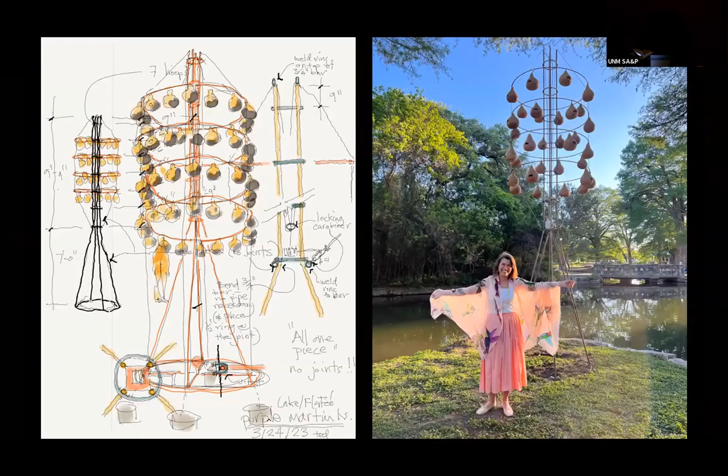So now I'm on this, we'll talk about the house, look the way we organize that, how we organize this fall from our process. And we use the word to illustrate how we approach this. And we began because...

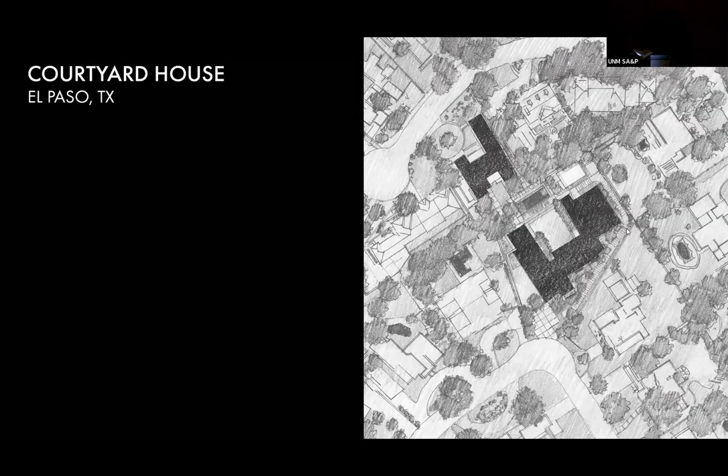And we love getting to meet our clients on the land, and it doesn't matter the scale. It's still the same issue of getting to know the place, talking with them, and simultaneously talking about their programs, but in a manner. So that you're trying to program the land rather than discussing what is appropriate and what's not appropriate. And so it's helpful. And that is the product.

So what we did was build the inside - this is going to be the land. This is all about making a big courtyard space where you can see the sky, because we were kind of fighting the terrain on this side. So we could get a big sky, get views around, and edit out the neighbors' houses. So we built the house with concrete walls around the perimeter, steel and glass, but it was all about the courtyard and thinking about how the program would handle that space.

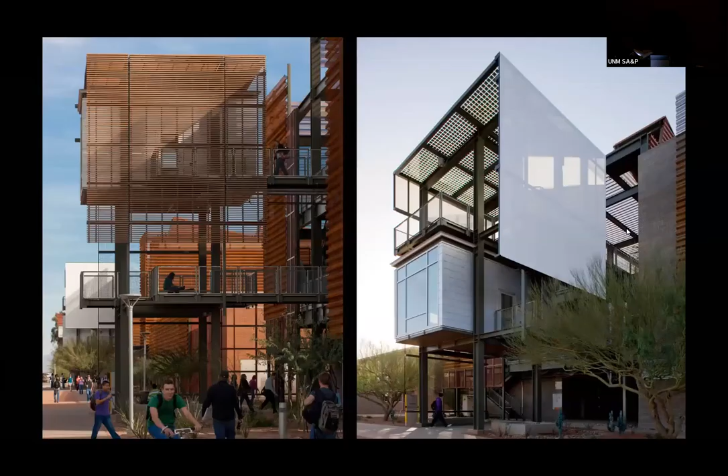We had great collaboration with Christy Ten Eyck, a landscape architect who was in Phoenix at the time and is now in Austin. So this is the Desert Wall - it's a desert walk with water, all the fluid space, and ultimately it's held in this amphitheater down at the end. The collection of buildings along the south side of this new desert mall creates these kinds of spaces that draw you in.

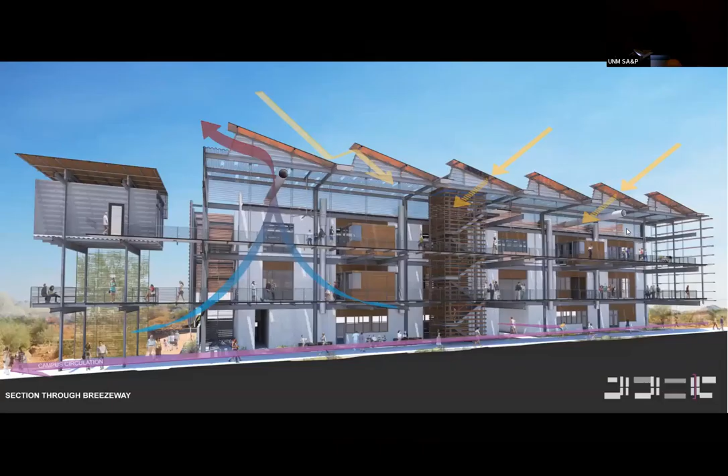And some of my favorite spaces - this is where we did all the lawn circulation. We had a huge amount of circulation indoors, and actually what we saved by putting it outdoors was money. We had these narrow spaces that were like the streets of Marrakesh, with perforated metal above and flow systems running through it, but it invited people into the space. It was great, and it's also ready to deal with the low angle sun. So we had two different sides facing each other, not having to deal with that kind of stuff.

And I enjoy kind of sharing these two scales of concept - working on a house scale and working on a university scale. It's quite delightful in that you can do different things, get different issues above that. So that contrast and that change is really nice.

In this case, this is the ranch. It's on a kind of flat-top mesa. Normally we would not put buildings up on hills, but this is an unusual hill - trees on it, nice flat top. It didn't have kind of a lovely river and things that you sometimes get in buildings. So what we wanted to do there was take that problem and start to talk about how the program could make a space on top of this kind of river-shaped base.

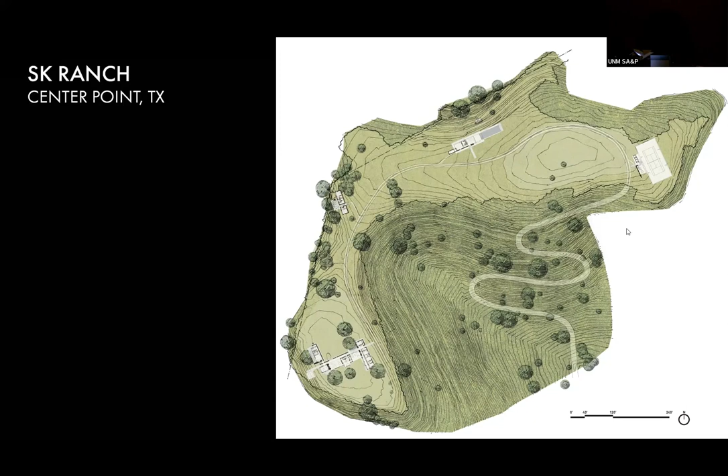And so it's the main house and the next house, but the idea was using station limestone, and using those walls to start to define and have a relationship with each other. So it's small little buildings within a larger, broader landscape, collaborating with Tary Arterburn with Studio Outside there in Dallas. But the idea, a lot of the interest, is staying outdoors as much as we possibly can with a project like this.

Urban scale was the work we started, master planning probably 10 years ago for a person who bought the old Pearl brewery. It's about a mile or so upstream from the core of downtown, and it was an industrial area where the Germans would put their breweries.

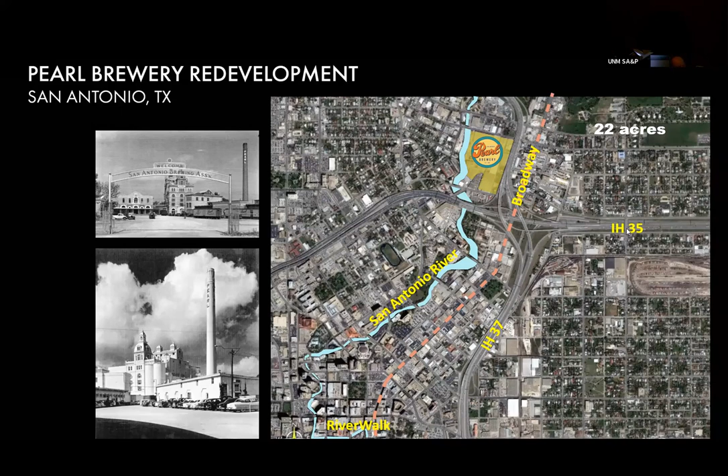There was, when we were getting to work on it, a lot more asphalt than anything else. So the key was creating a plan that laid out all the outdoor spaces simultaneously. We were very lucky, our developer was not a professional developer, so a professional developer probably needed to get a return a lot quicker, and we'd probably be dividing up the land pieces.

Instead, we were able to do a true master plan and then start to check off the boxes and slowly create a brand and a place for this really transformative project for San Antonio. It's had ripple effects all around it, and it's also allowed us now on urban scale to get into a number of design projects.

We took the client on a tour of some great Mexican plazas, paced them off, talked about the scale of those spaces, because some of this is existing but a lot of it is new. We needed to make space with the new buildings and also bring back the ones that were lost in the sense of the grid, but it had a kind of screwy arrangement through it that had interesting routes.

We created the opportunity in the earlier stages where you drive through, but in the later stages you stop traffic. So it's a way to introduce a lot of the ideas of the place more easily to people, make it more accessible. And then it was a lot about the landscape.

We worked with three different landscape architects over the years on this project, and it's what we love doing. We're lucky enough to get to work with really great talent all over the country. One of the things is that we ask to be involved in the landscape as well as have them involved in the buildings.

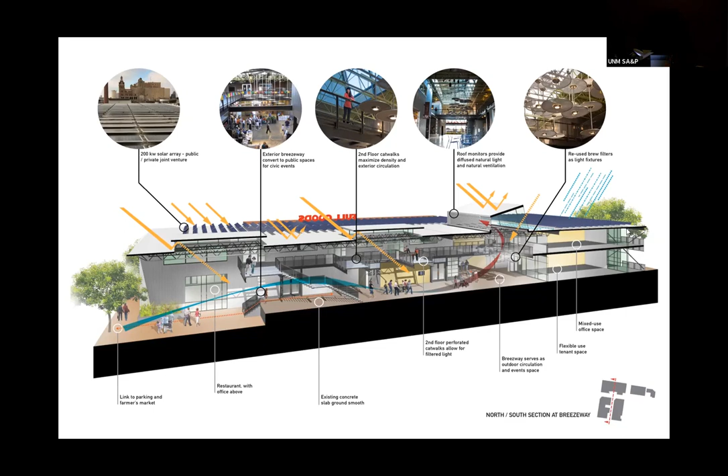This turned out raw and interesting, and it's probably one of the more popular buildings. It's also set the direction we're going on this project, but it's allowed a lot of other hands in—like our office, it often has different people working on the projects, embracing the same philosophy and leveraging that new perspective, and we think the work gets better over time.

This was a project where they started hiring a new office as well, and it's delightful to see it evolve in a really fluid and natural way with the city. But it had good bones, good structure.

When we first were working on the project, we said one thing we wanted to make sure of was that we set all the elements to allow for the different parts of the old beer industry, and put it in the warehouses. So every time someone renovates or does a restaurant, they can go to the bone pile and use a lot of that product. And then there's just the river.

It's a very important project to restore and renovate this section of the river and invigorate it. As the river continues to evolve, it's critical to having some level of energy adjacent to the river.

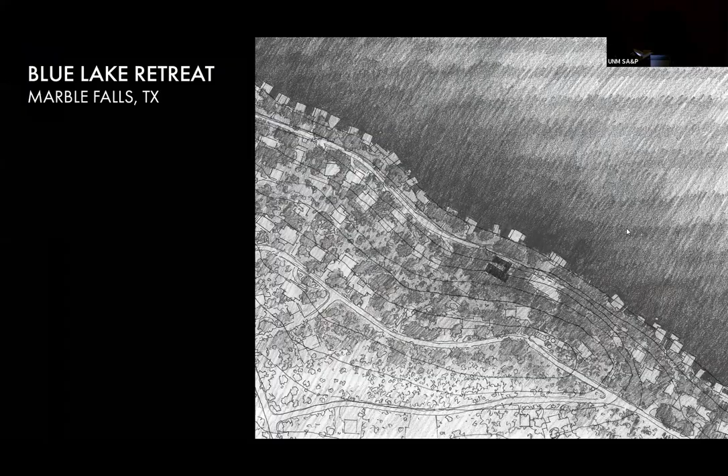So this project, I'm showing you this one. This was for a friend of mine. His father was one of the big high-rise architects, so the kid grew up with a fabulous sense of it. He was big on high-rise, and we had this very, very steep site.

So we were thinking, in order to work with that site, we also needed to build a dock. How do you make a boathouse sit on hard granite conditions? That also spoke to needing it to be light steel, since we're working with a very vertical building along the hill. It needed to be stiff and strong, and doing the leg meant the two buildings were informing each other. So we built at least that superstructure out of steel, but given the expense of steel, everything else is wood. We tried to keep the real critical structural components made of steel and everything else made of wood, then used that steel to tie back and contrast with the lightly granite-based cliff. That was the notion of that project.

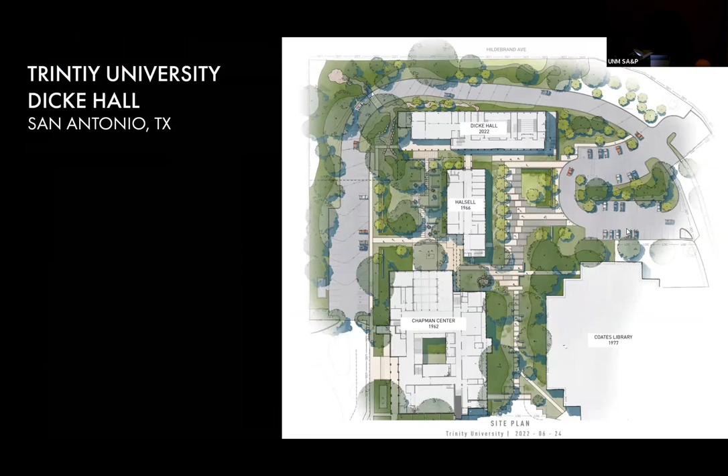Recent favorite projects is one we're working on at Trinity University. Let me explain this—this subject again is just that. They're not new to San Antonio, work by O'Neil Ford. O'Neil Ford was a marvelous Texas regionalist who moved to San Antonio and worked on some very big projects, including renovations of some of the older sections. So he really got to appreciate older things, but he was also a modernist, and Trinity was one of the best examples of this work. Trinity is a small campus, let's call it, in the middle of town, built in an old rock quarry.

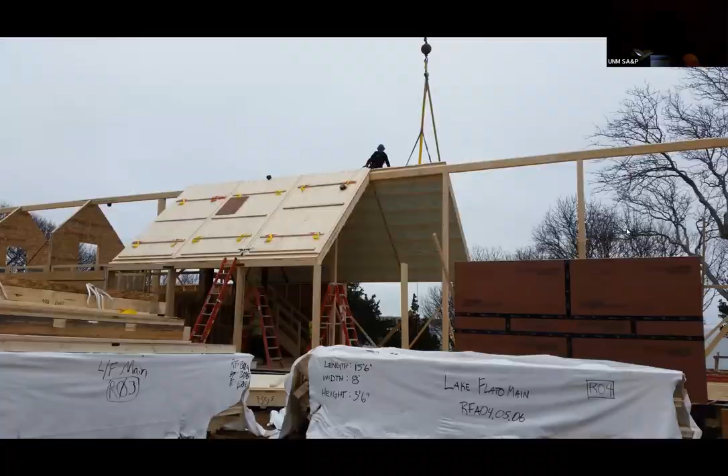But the technology played a big part in our thinking and the opportunities. The idea was we could start the panel process well before we got a permit. So we were putting in the permit, and by the time we get the permit, we could build all the way to the slab, and then bring the panels in. It was also a speed issue.

It was about the permitting process, but it was also a kind of sustainability - we always try to imagine what we can build in ways where people don't have to travel long distances. In this case, by having the shell already built, we could save a lot of money by not having to rely as much on local labor costs.

And then once you have that decision - structural engineers are critical players in our work, but in this case we're using the engineers from that company. We were able to do spaces like this that you wouldn't normally do - columns would be exposed and done beautifully in New Hampshire. We could order the windows, laid in advance, so things could go along, and then you can celebrate the volume.

On the outside, inside this light - light can come in, open it up easily in the summer, but close it in and make it really intimate in the winter. So it really worked to inform the way that we build it. So opportunities - we're always looking at clients for these kinds of opportunities.

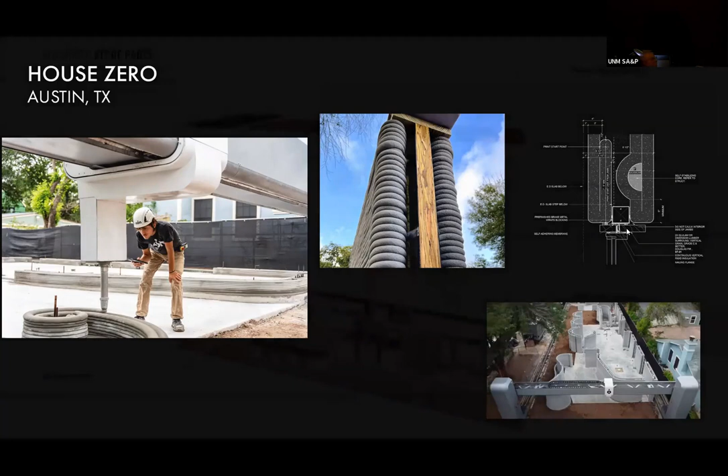There's still a lot of work in the architecture. So what we thought too in this opportunity is how do we also think of all the other elements being prefabricated. Now we're probably not going to do them prefabricated, but it needs to be thinking about it for next time. So it's always thinking about things that way.

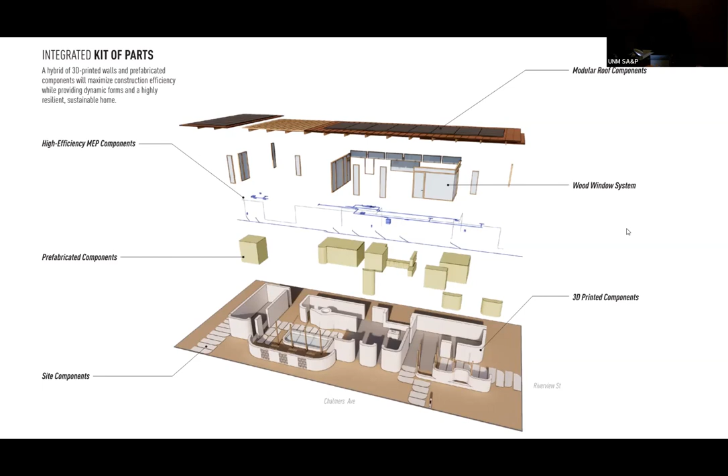So we imagined a lot of the cabinetry kind of things, kitchen kind of things, a lot of the interior infill things, all out of wood. And this building did get built in 6 months, and it was during COVID, so it's quite incredible.

It was just because we really spent time on it. The other part that we wanted to showcase is all the things you can do. But this is the opportunity to use it. So we did these little benches, kind of rather interesting spaces, and it's a tiny house.

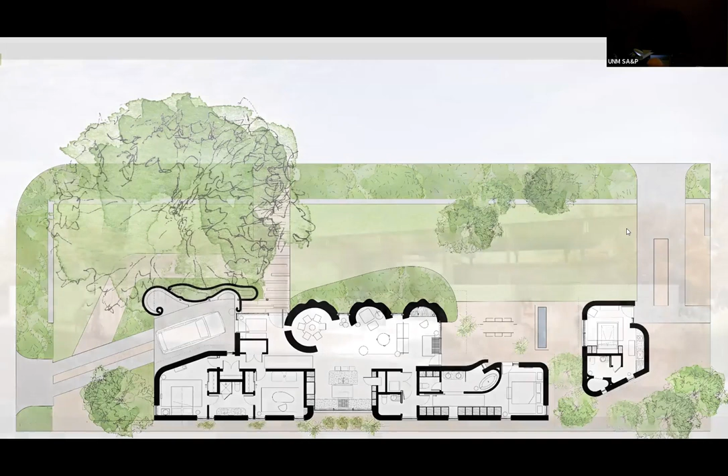It's really a small square footage house, but it feels quite generous. And we did that by this vaulting, big space, vaulting, which we didn't actually do at first. It was a traditional block, deck and beams, but by popping that roof up and having the low closet sections, you get this sense of volume in that type of space.

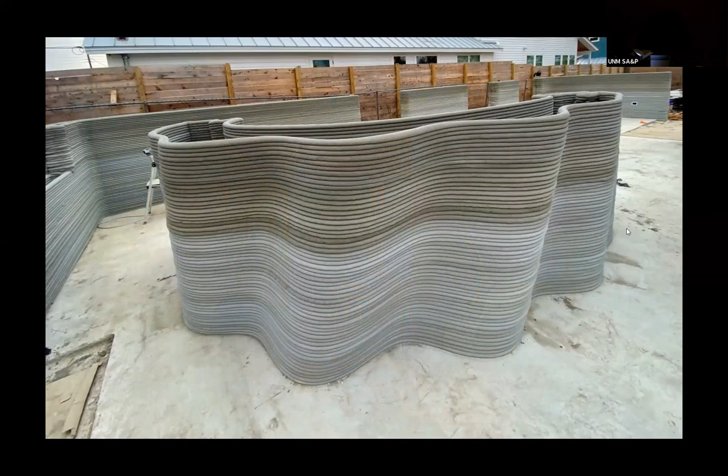And the wild thing about it is changes in the sand, the water, the air changes. You end up with a corduroy effect. These walls are quite elevated, quite beautiful, and very soft concrete. So it informed how we were going to do things.

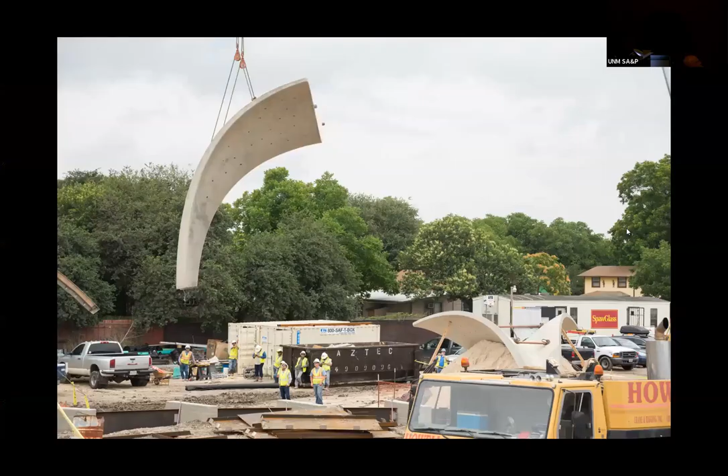And the assignment was again about the shared structure. So we also thought that we would do this offsite, which is pretty straightforward today. And we would pour multiple shells on site, and then pound it all locked in. And what we wanted to do with the shells was make them like a rock formation, in the profile of the grains.

The author really knows this karst geological condition, where rainwater comes down through limestone and creates many dry caves. So basically, when the shell structure works, it cracks in the upper parts of the concrete when it comes together.

The water rolls off the edges of these things, much like it does elsewhere, and goes into an underground cistern where it's recycled. All the planting was native grasses, to demonstrate how to plant in South Texas.

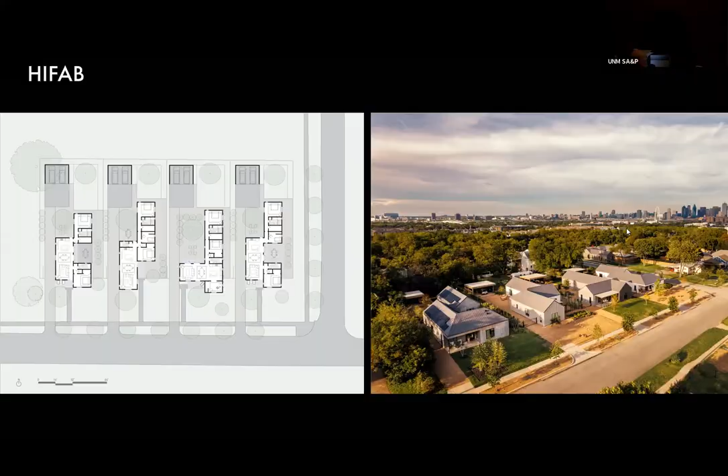This is actually a picture of when we were doing the Porch Houses with another person's factory. I can show you the method. It'll be interesting to see, curious how it's something we have an obligation to constantly tweak and look at.

All of this, the land, the program of the land, thinking about how to build, is ultimately about sustainable business management. It always gives opportunities - you can always do the most sustainable things at the time, setting examples for opportunities.

In this particular case, this is the Dixon Water Foundation, a nonprofit focused on tallgrass prairie inside of Dallas. They wanted a visitor center so people could experience it, and they're also very interested in sustainable agriculture, combining the role of water in grass management. So it was a perfect opportunity.

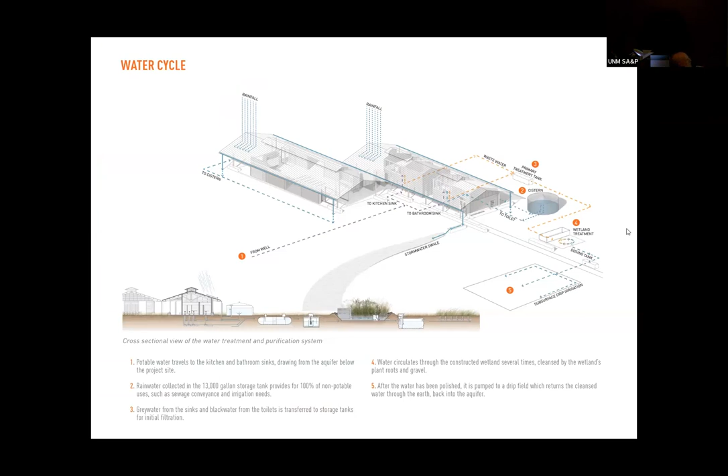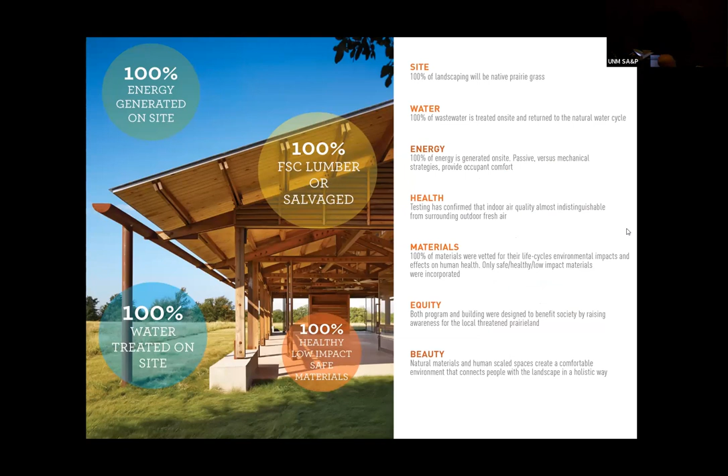So we had rolling walls that can knock down wind, and then thinking about rain management - collecting that off the roofs, and the whole method of rainwater treatment, working in this case with Biohabitats on a sustainable wastewater treatment system, not a septic system.

And a winery - not too long ago, in the old wine section of California, Paso Robles, celebrating the beauty of winemaking in a house, in a container that would reflect well on the whole process of winemaking.

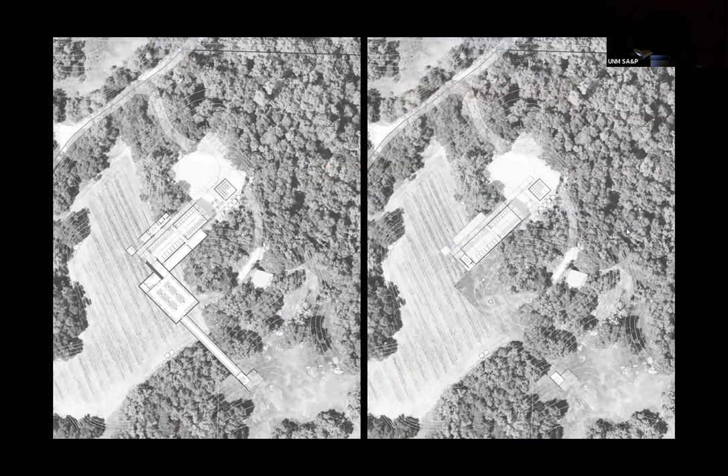We thought a lot about how we could have these really unconditioned shells for the winemaking and wine storage, so a very limited conditioned footprint. A big shed with an automated window system that you can adjust to allow the cooler air in at night and close up during the daytime, thinking a lot about circulation, airflow, and celebrating the whole winemaking process.

Then thinking about storage - normally you might put it in a keg, but in this case we did it as an underground bunker, made of concrete with portals to bring in natural light, into this cool space. This is before the grasses were growing, up and over that collection area for the wine storage, and in addition, a pretty small, minimal space for things that are required.

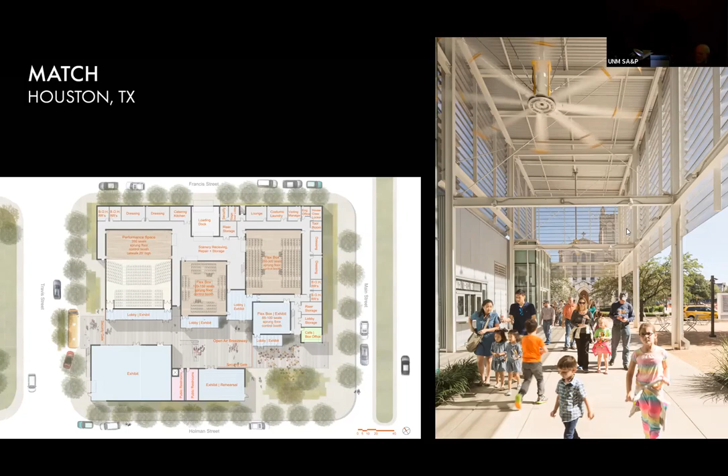It becomes like a great shared plaza space with a big roof shading the color, and it has been very successful. So we made it in steel, perforated, not only the greatest stair that leads to other levels, but all about creating an open air lobby.

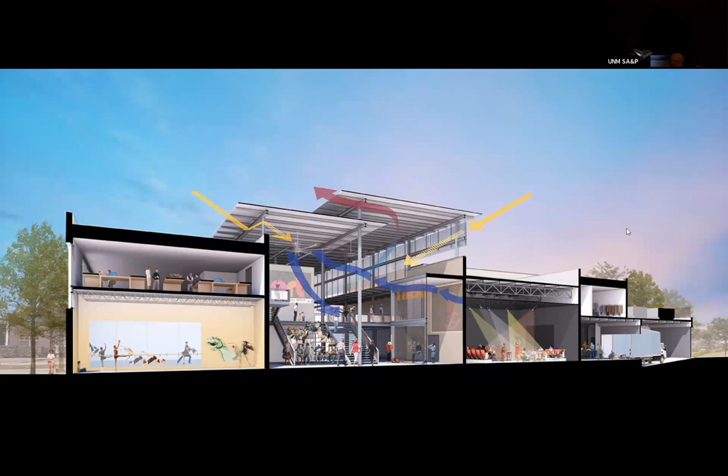And the theaters are not the easiest things from which to create a sustainable income, but you can do a lot of other things. You can arrive at a great place for that.

So that is it. Now let's find out who won it.

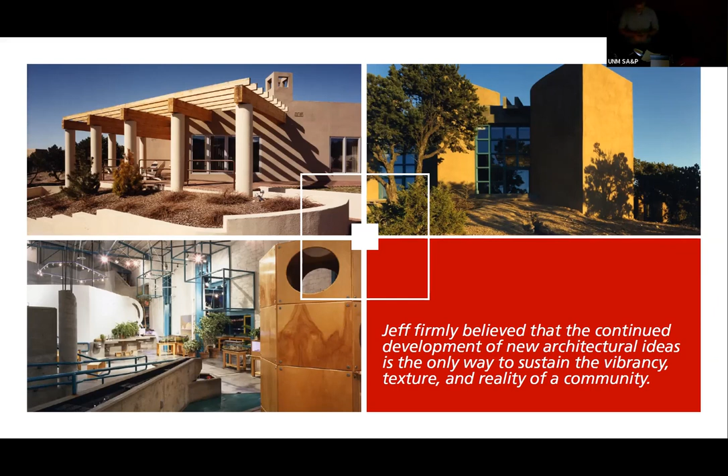This award started in 2007, as we noted last night up in Santa Fe. It originally started as an award for contemporary architecture, which it remained that way for quite some time until 2018, when it started to expand into unbuilt architecture and unbuilt landscape architecture. It wasn't until 2021 where it really expanded the award, and we started exploring some different topics where we looked at emerging New Mexico practice, but also started including student work in architecture and landscape architecture.

If anyone participated in the juror roundtable last night or listened in on that, we are always in conversation of this continued evolution of this award. Because in 2021, we also expanded from just being New Mexico to looking at the Four Corners states, and this is continuing to redefine what is the Southwest, because the original award was the award for contemporary architecture in the Southwest. There was some fantastic discussion around that last night as we started to massage this boundary with the student award, looking at ecoregions. We were talking about watersheds, and just looking at the original indigenous inhabitants of this region and how they've also adapted to this landscape. So the award continues to evolve.

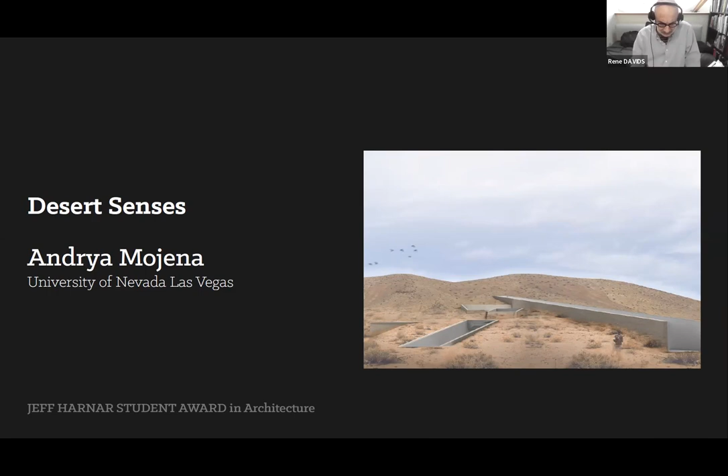We wanted to say that we were really impressed with the project because it seemed to capture the desert and that special area of the desert really well. We were also impressed by the 4 categories she used, which were under the ground, in the ground, on the ground, and over the ground. These spatial differences were really appropriate for expressing the idea of the desert, the vastness, and the relationship to the sky. We also thought that the gestures were subtle and they seemed to capture everything which is so dramatic about the desert. Fritz, do you have anything to add?

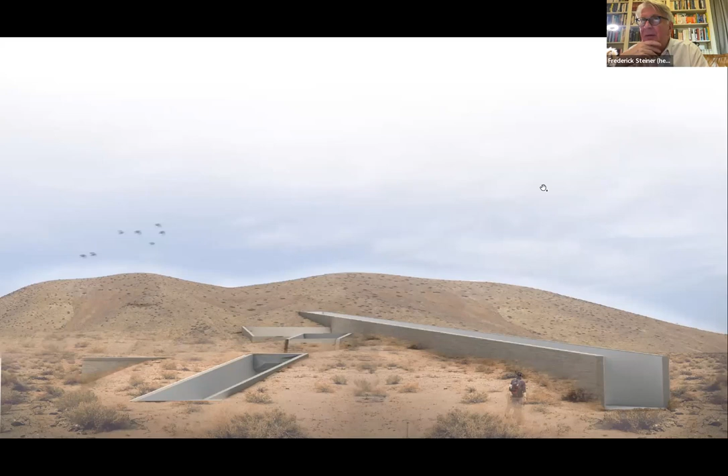Yeah, I'd like to also just add my congratulations. We found it a very stunning presentation, and there was a very strong linkage between the analysis and the design, and especially attention, as Rene said, to the environment, but also careful use of materials and exploration of materials. Also the sketches were particularly nice. They seemed to lead in a very fluent way into the design, and we were impressed by that as well.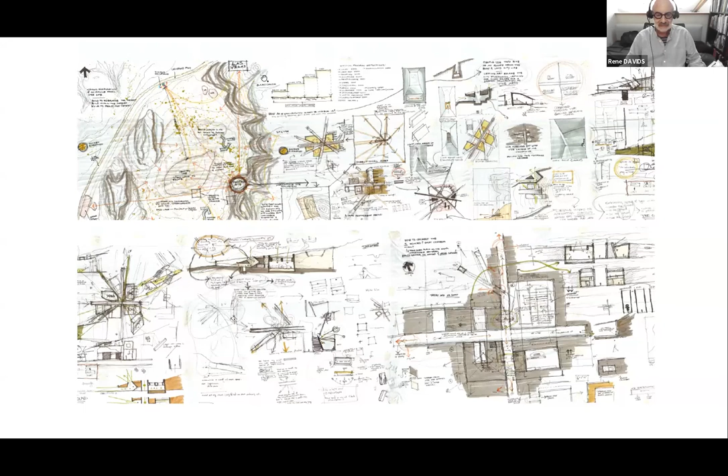What's that? Oh, yeah, congratulations. Thank you. Yeah, which, I have no idea. Oh, that's really bright. I go here. Which one? Did I just shut all lights off? There we go. All right.

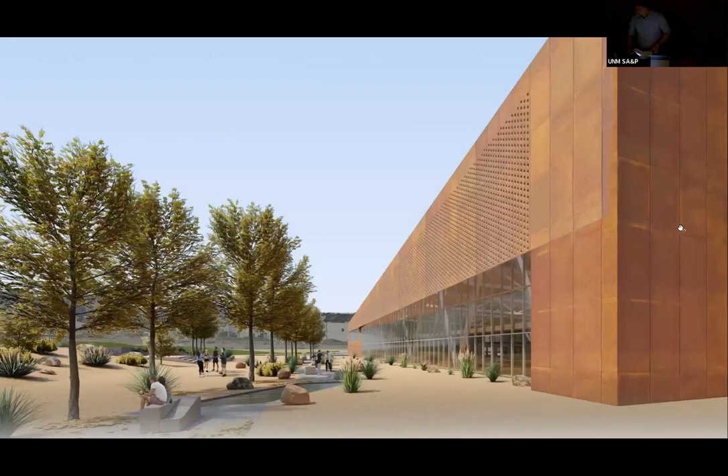And jurors, would you like to provide any comments on Thomas's work?

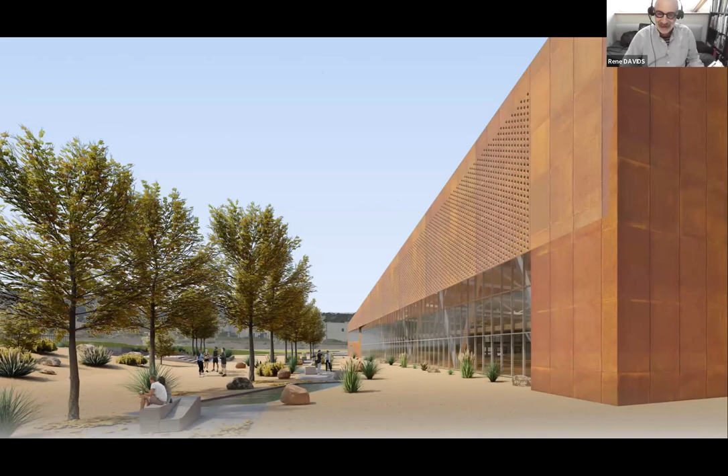Congratulations to Thomas and the University of New Mexico. It's great to have one of their students winning the first award. We were really impressed with the concept, which was derived from the mine. It seemed very appropriately used in the building itself. We loved the use of materials and thought it highlighted the spirit of the desert.

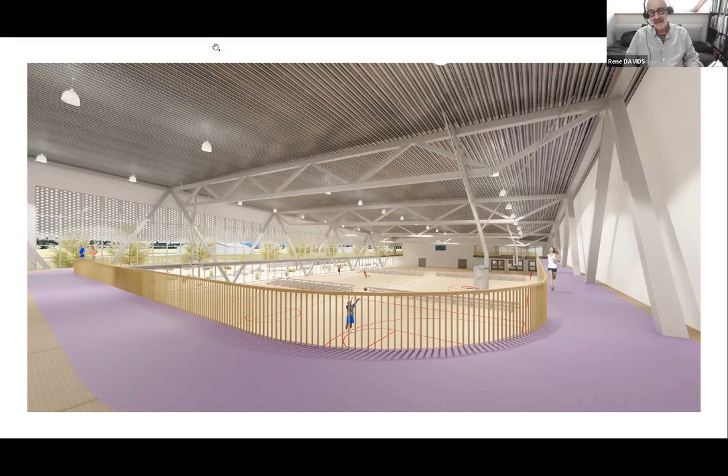This slide actually shows a very interesting relationship between two of the functions of the recreational facility. There's a running track you can see on this bluish color on the top, looking down onto the basketball fields, which we thought was a really nice, interesting thing to develop. So we were really impressed both by the outside and the inside of the project, and thought it was extremely well resolved, executed.

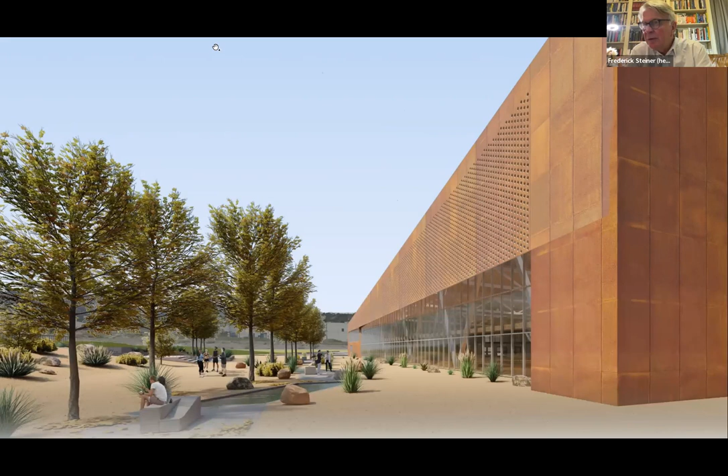We also found it a very convincing design because of its thoroughness. It went from concept all the way through, fairly detailed designs with a very effective rendering, such as this one, and very convincing. So we thought that it stood out for its quality, but also it was probably the most thorough of the architecture and student entries as well.

So congratulations. Thank you. Good time.

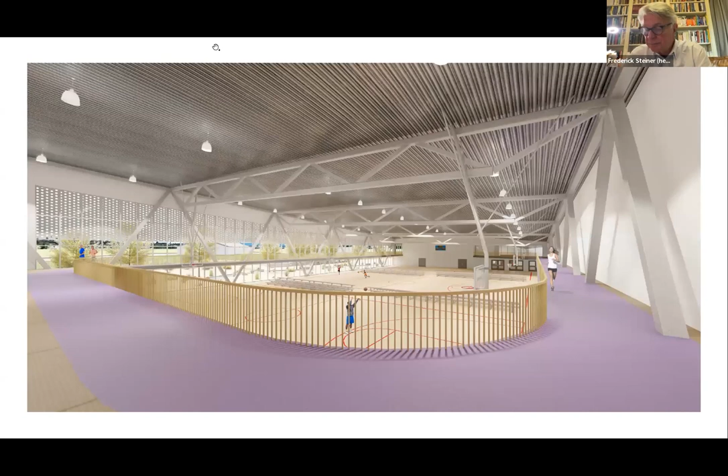All right, and now to landscape architecture. The second prize for the student award in landscape architecture goes to Valley of the Mills, Recommoning Land Along the Upper Rio Mora by Leah Grieser, University of New Mexico.

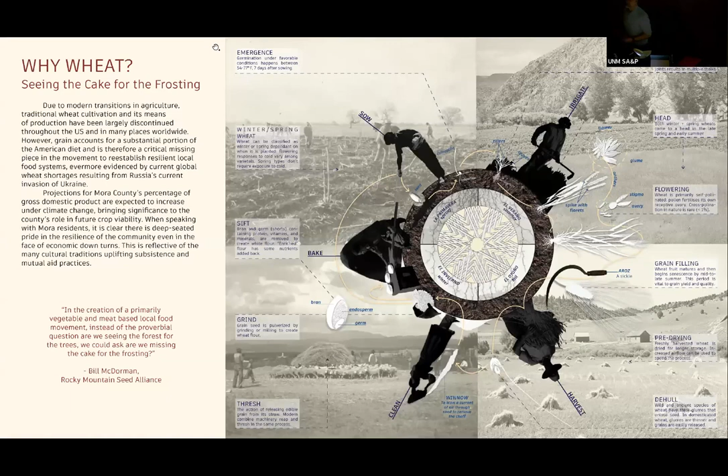Congratulations. Well, congratulations.

Last night at the roundtable, there was a fair amount of discussion about J.B. Jackson, and in this particular project, there's sort of a feeling of Jackson as far as looking at and going through the landscape. It also did a really fantastic job of looking at cultural and ecological revitalization following the devastation of a fire. It showed a great amount of social consciousness as well as environmental consciousness. A very well done and thorough project.

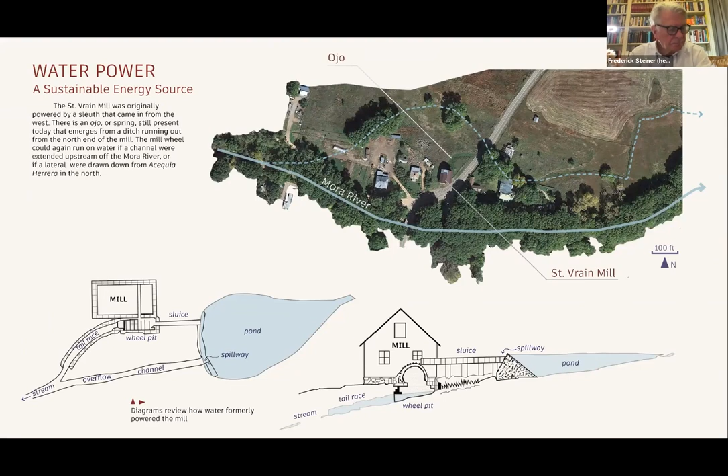And I would just add, Renee really loved this one a lot. Yeah, but I don't have that much to add to Fred. I thought it was really well researched and nicely presented, and it seemed to sort of bring an old technology into back, but given that it was a small project, it seemed really appropriate, and I just thought it was very sensitive to the land. Yeah, I did like it a lot. Congratulations.

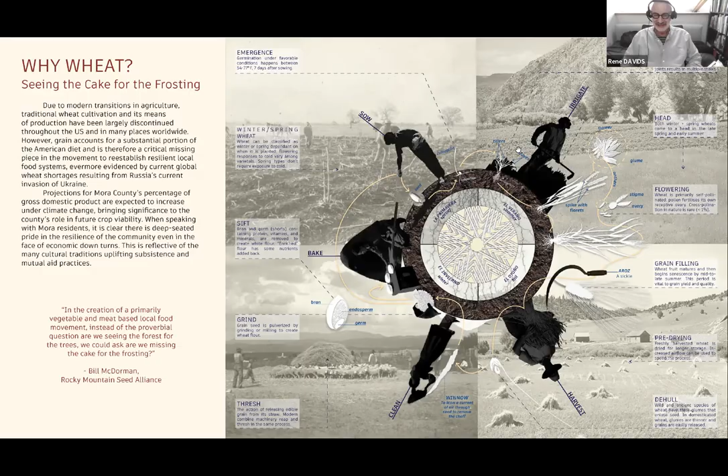And now for the first prize in landscape architecture for the student award. And the first prize goes to How to Love a Mesquite by Hollis Moore, University of New Mexico.

Is Hollis there? Hollis, are you here tonight? Hollis, how could you do this? Well, is Hollis online? We want to congratulate Hollis.

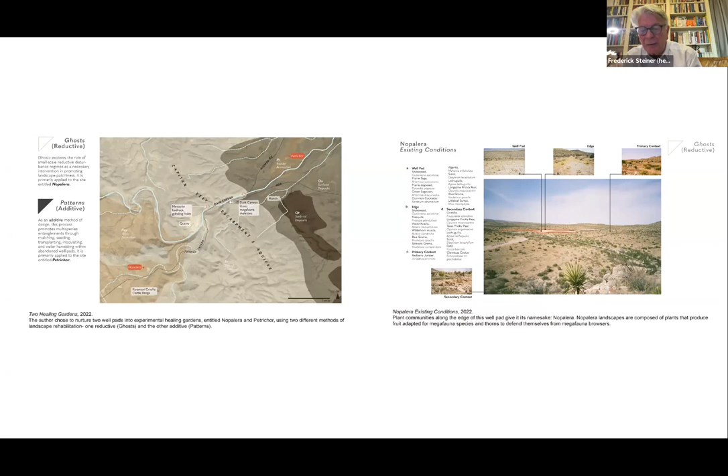This was all of the three jurors, all voted. This was our only unanimous choice, and we all really ranked this first. It's a lot about healing. It's about the Chihuahuan Desert. Very strong analysis. Really liked the mixing of media, everything from watercolor to GIS, strong sections and renderings. Just an overall thorough and well done project.

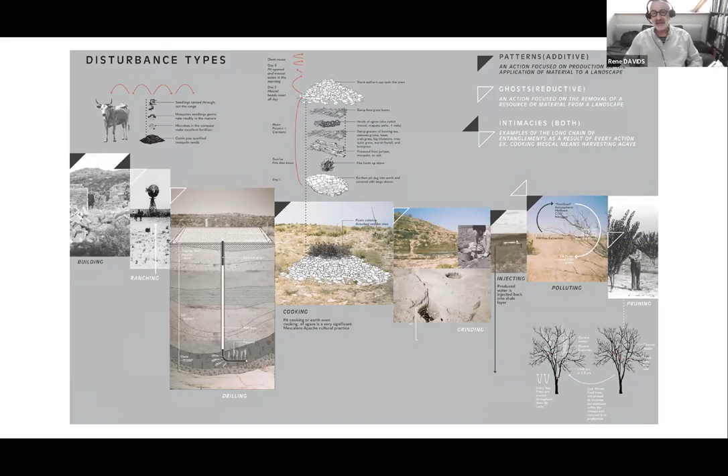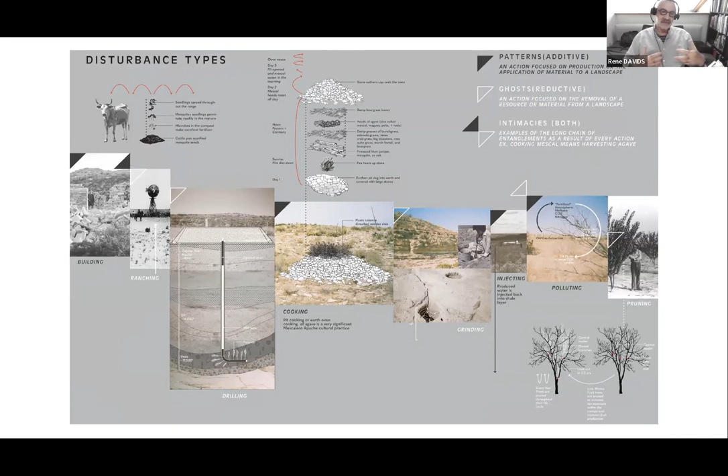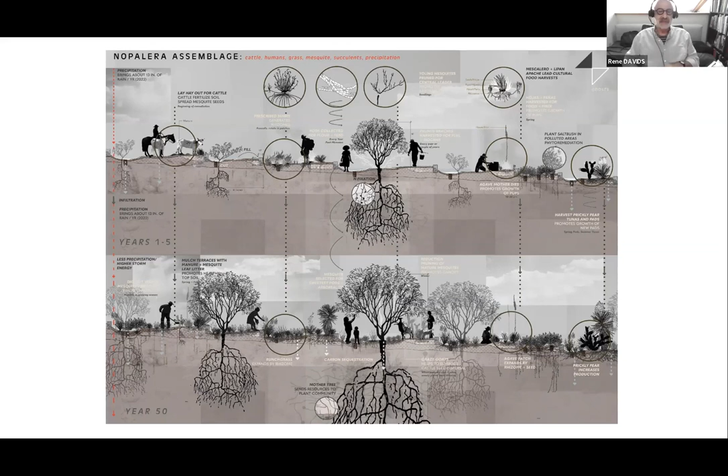Yeah, as Fred said, we all agreed. I think it was the best research and the most interesting of all the landscape projects. I was really impressed by the way it sort of mixed the idea of the landscape, the animal habitat, and humans all coming together to restore the ecology. So it wasn't trying, like many projects of this sort do, to eliminate human beings, but they were very much part of the bringing back of the mesquite in particular. Great. Thank you very much.

And congratulations, yeah, Hollis. The absent Hollis.

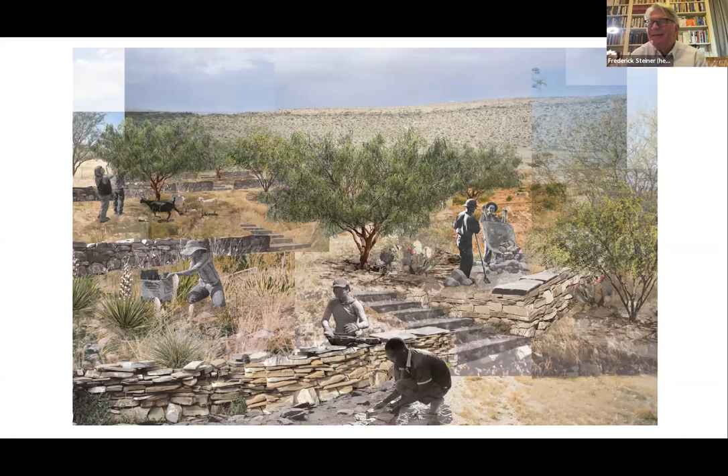All right, and next we move to a new category. This is the Professional Unbuilt Award for architecture and landscape architecture. However, we did not receive any entries in landscape architecture this year. So, but I would like to introduce our jurors. Jennifer Siegel is the founder and principal of Office of Mobile Design, or OMD, and also a professor at USC. Carlos Jimenez is a professor of architecture at Rice University. And we're also joined by Gabriel Diaz Montemayor, associate professor of landscape architecture at the University of Texas at Austin. We are happy to have all three jurors with us today.

And the award for architecture goes to Parawan by Assemblage Studio from Las Vegas, Nevada.

Oh, oh, well, congratulations. All right. Well, congratulations.

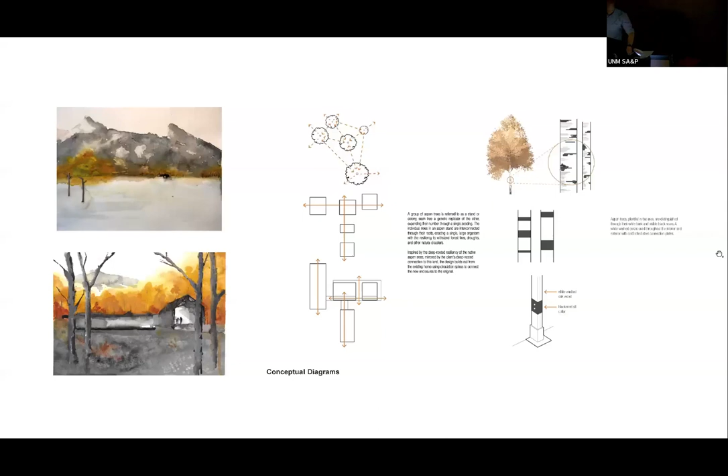What's that? Yeah, you can. Oh, I'll slide you more image. You guys go there, so we can see all. I know, just check for. She's getting recorded. How do these lights work? There we go, that's a little bit. No, like you had them before. Hey, what's that? Does that sort of work? Okay.

What's that? How should we do this? I'll see a couple things just. Is there a microphone? No, you just shout out. Just shout out? Okay, yep.

First of all, it was a joy to work with these two on our Zoom jury, and then to meet here in person and spend a few days together really talking about architecture and concepts and ideas, and the thought behind this amazing prize and its evolution. It's just been a gift to be here.

And this project really stood out in the category of unbuilt architecture. The presentation style, like these watercolors, the purity and the sincerity of the design came across through the media, the attention to detail. What stood out to me was its relationship to elements in nature—maybe the skin of a tree—and how that material can then inform the building. There's a concert between those two elements.

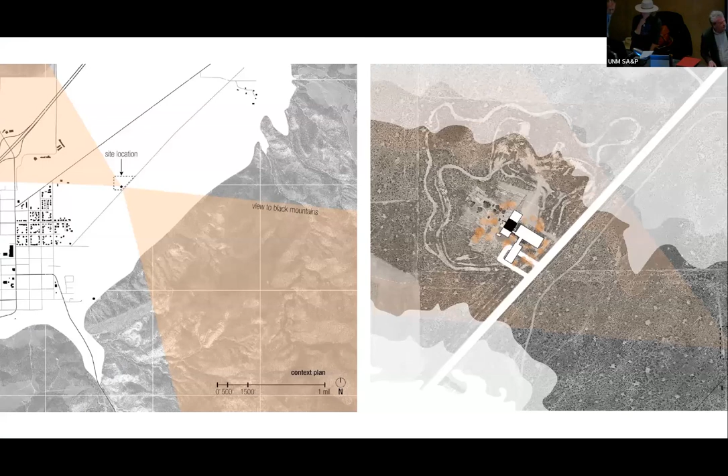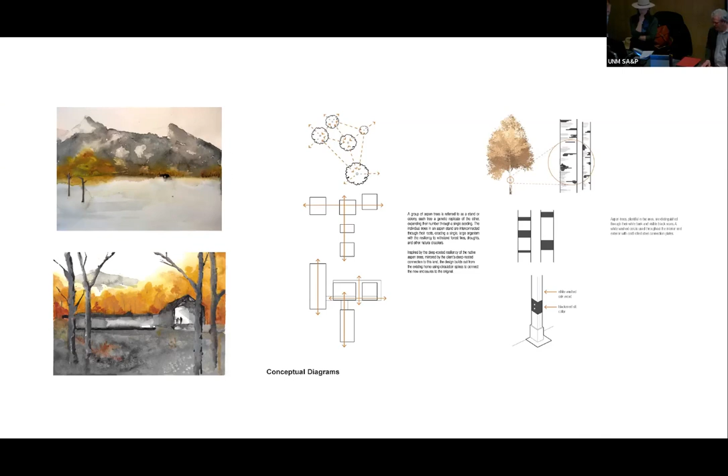But I will say personally I could also settle into the presentation, because it's such a central system of tools and instruments and techniques. Jennifer pointed out the watercolors, which were quite persuasive in the way they create an atmosphere, and also the diagrams. But then you start to see the more technical drawings, and they have the same detailing and sensibility. We love the interior renderings too, that began to relate the continuity of a landscape that obviously overwhelms the architecture. There's an image where you see the columns almost emulating the treescape.

The aspens, yeah, right? They're aspens, yes. And I know it's not a New Mexico project, but it's wonderful to welcome another state in the Four Corners. So congratulations.

So this year we did add another award as we're starting to play around with some different categories, trying to look at ways this award can also align better with the foundation. So this category looks at a jury-nominated project that they thought had a strong sense of social justice in architecture, but also through the lens of the Jeff Harnar Award, where there's a lot of creative experimentation within the project. This came up in the conversation last night, and seeing all the entries, this really made this project click in my mind. The jury will explain some of the thought process behind this, but it's a really interesting project.

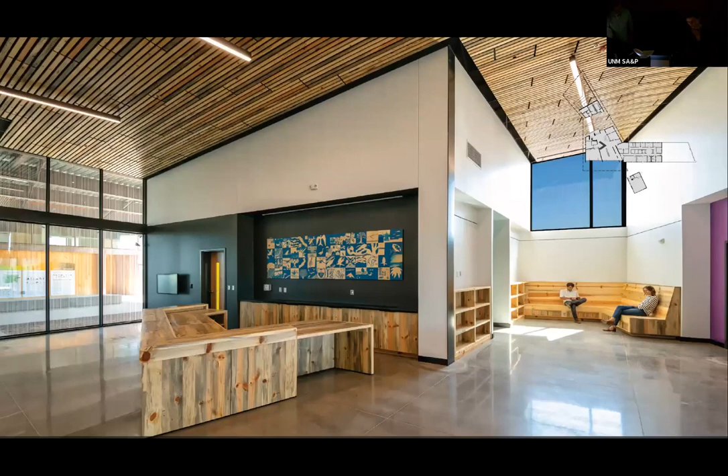I'll go ahead. So, of course, this project is not only excellent in terms of its design qualities, and I actually went there this morning to check it out in person and can confirm that I'm really happy that we made this decision, because it really frames the landscape in a beautiful and light way without overpowering it. It seems to float above this immense plain, using materials that are contemporary but at the same time very beautifully integrated with the land. And I'm sure that with time, the project will gradually blend even more into the landscape. This is something that takes time.

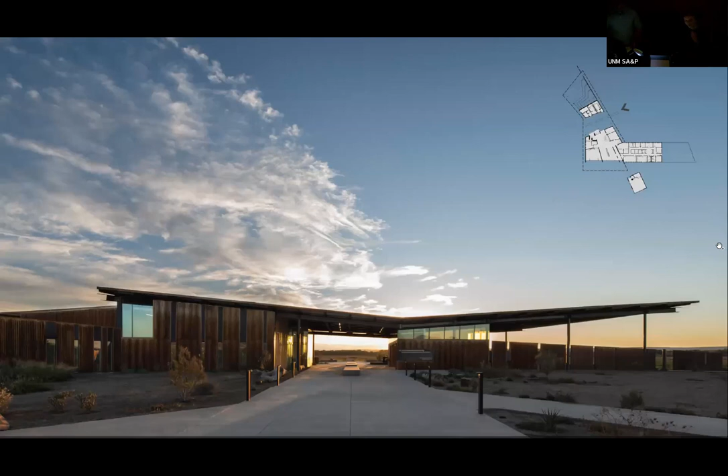But one thing I wanted to add is that what I really wanted to recognize in this project is also an architectural office that decides to take a risk and work with a public institution and commit themselves to a lower budget project, to actually make contemporary architecture accessible to a wider public. And at the same time, do it on a project that brings people closer to the land and closer to the landscape by framing it, making it visible, making it more than just a wasteland. So for me, that engagement and your continuous effort and dedication to that cause deserves recognition. So congratulations.

Well, I wanted to add a few additional words. I knew this project quite well. When I came to University of New Mexico, this was the project that we did for our class. It was challenging, so I knew it. And it's lovely to see what you had done. There's nothing nicer than to have already imagined something and then to see how it is done in the hands of a really talented group of architects.

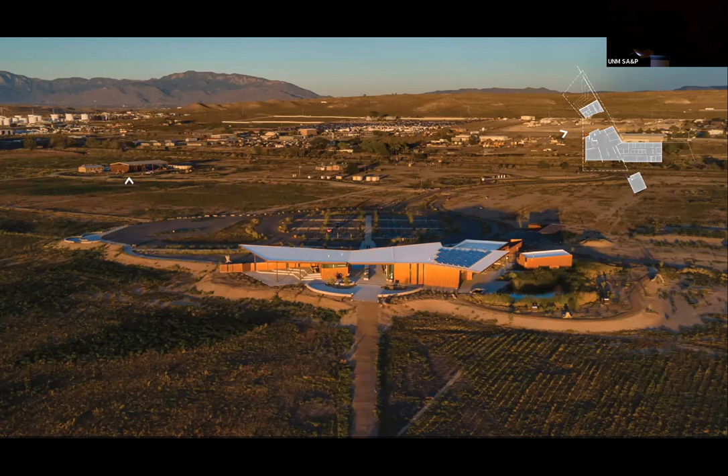And one of the things I was very aware of—though you had to dig deep to find it in your text—was the conditions of this design-build project. It had a set budget in the beginning, and you had to put a lot of effort into collaborating with the contractor to have a design that they would also agree to build for a certain price. Not an easy thing to do at all. The simplicity and restraint of that very simple folded roof obviously convinced them that they could build it within those numbers.

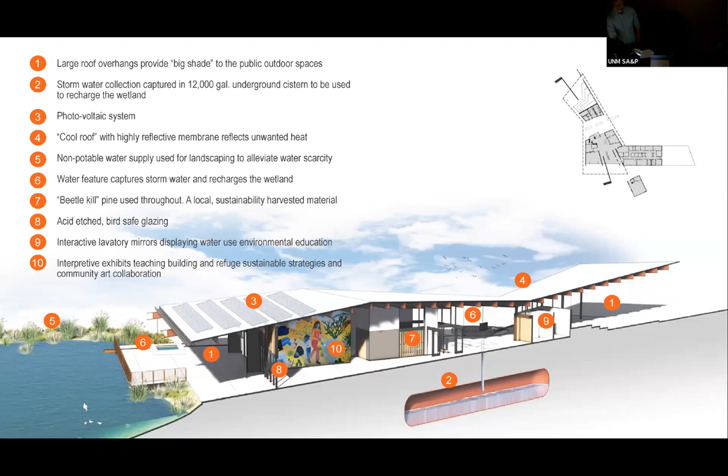But you had to move on that pretty rapidly, and I don't know if this was the first iteration—I can't wait to find out. But anyway, really congratulations on a marvelous project and a wonderful gift to the community. Thank you.

And would the team like to say anything this evening? I would like to say that this was a great collaboration, first and foremost with my partner, Owen Cramey, but also a lot of other individuals that couldn't be here tonight. I see Kenneth Francis with the surroundings crew up there. I want to give a special shout out.

We also heard about Biohabitats and Erin English and her great team who helped with sustainability on the site for this project. This was also a great collaboration with contractors, so I want to give a special shout out to Brycon as well as CF Padilla from the Isleta Pueblo. And most importantly, to our great client, U.S. Fish and Wildlife Service, specifically Jeff Johns and Refuge Manager Jennifer Owen White. Thank you all very much, those here and those that aren't.

Wow, I messed up—a very big player: Weddle Gilmore, Phil Weddle, was an incredible collaborator on this process. Couldn't have done it without him, really enjoyed working with him, a very talented architect. A lot of hard work from a lot of team members, really talented people. It's a really amazing project for the community, so everybody enjoy it—if you get a chance, make it down. It's not too far from town, 20 minutes south. Thanks for selecting us.